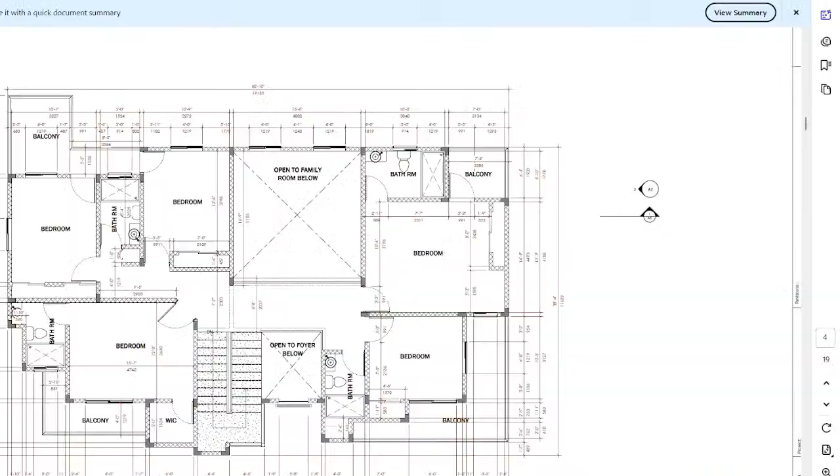So this is pretty much a six bedroom house that I am supposed to do some cross checking on. There's an initial quantity that was done for this property. I was asked to do some reevaluation because the quantity is old. It wasn't done by myself, so I can't really vouch for it, because everybody does things differently.

So basically the situation is like this, and I'm doing this video mostly for people who are either in construction or who want to do construction. This is the process that I recommend. Other people might recommend something else, but I'm just referring to what I use and how we use to get good results, well, majority of the time.

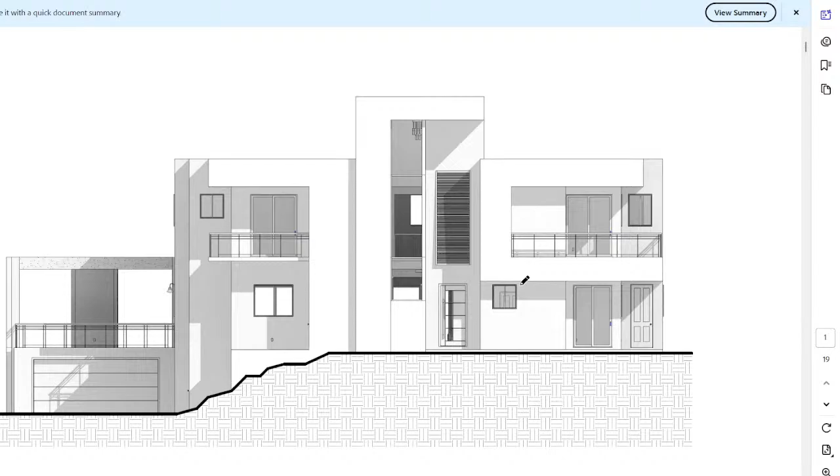So the case is this: a customer shows up, or gets an architectural drawing done. They want to do construction. There are many times one might want to go to things like rates, such as what you see on Excel now. In other cases people will go to contractors to get estimates, etc. But many times I think those approaches are based on a lack of information as to how most of these business arrangements are supposed to take place.

Most customers are looking for the perfect contractor that has everything well put together, that they can just hire and go forward with. Most persons in construction think they are actually that good, so a customer can engage them like that and get good results. But there's no consistency in anything in the technical world. Things many times can come together, and they can fall apart based on rough ideas.

So going back to my setup, the drawing is done. Let us see if I have any kind of diagram that can help me. I'm going to try and run this for one hour, hopefully I get a guest or two, especially on TikTok. If I don't, I might be off earlier. So I usually use a draft, like a chart, as to how you move from one location to the other. In this case, the drawing you're seeing lines up with what we'd see as the approved design, right? That's what is being presented.

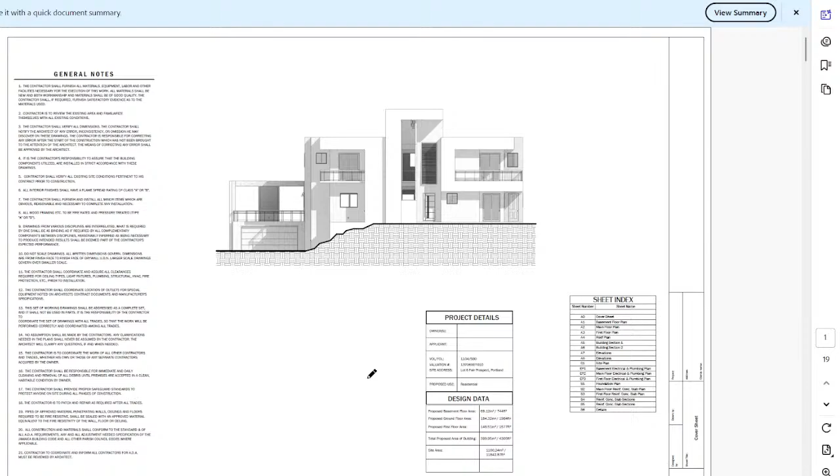Now, let us just say fine, the contractor is going to be engaged. There are several questions that need to be asked from the customer standpoint, and there are several things the contractor needs to know. One of the first things is going to go around the design data, which is the information presented here. This is the common go-to for persons who want to engage in construction related activities.

They are going to common time go to the total area of the building. In this case, it is saying 4,305 square feet. That's a total, and many times you are going to get the typical approach, which is multiplying the area by a square footage cost.

Now, I personally am not a fan of the random square footage presentation, because there are a lot of questions left unanswered. Many times it can present a case that work is at a certain price, and it can confuse people into thinking the project is either too expensive, or even too cheap—I'll just put it like that.

Now, what a person uses for their square footage value will vary. There are people that will use 15,000. There's people that will even use 14,000. There's people who use 20,000. There's no consistency or any regulation on that matter to prevent a person from saying a square footage cost.

The issue with the square footage presentation, similar to what you're seeing on display here, is that after presenting this info, there's many times the need to answer questions the customer might ask. So let us say the customer here, that is going to be say $60 million—there are several questions that are going to come up.

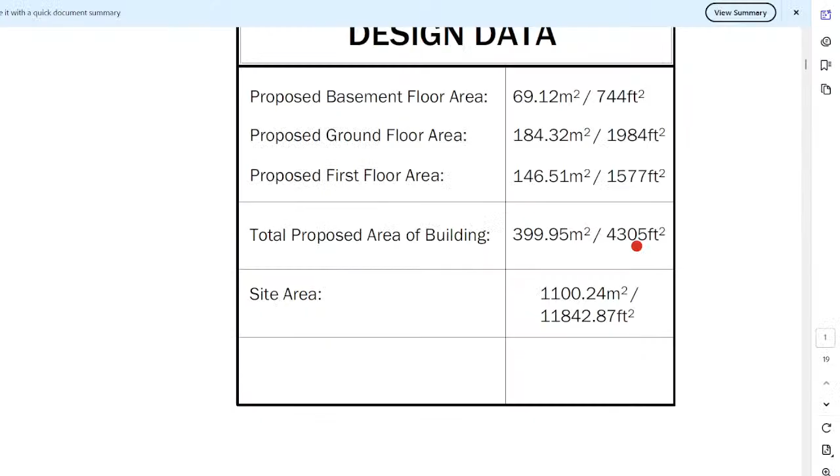One is, how much money will be required to start the project? How much money is needed to carry it to a particular point? In this case, it's almost like 2.5 floors, and I can show you back from the presentation. Yeah, so this is like a half a floor, this is a full floor, and another floor on top of it.

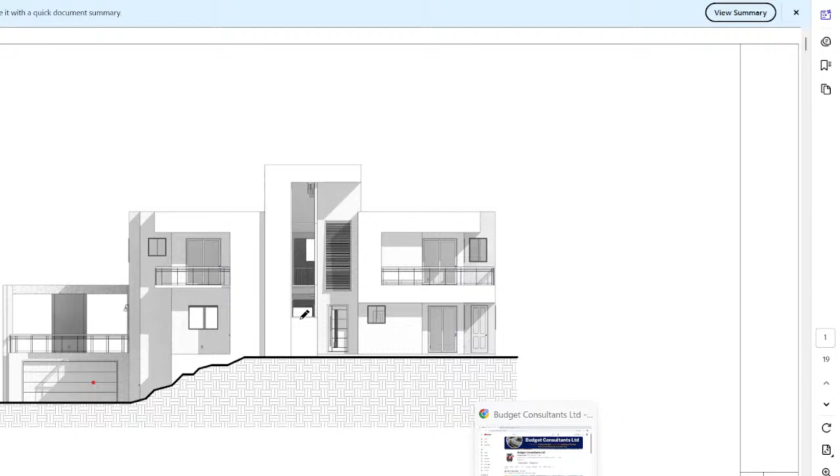Now the customer might ask, how much money does it take to do the basement alone? How much money does it take to do the ground floor alone? The ground floor and basement might exist also, and the person is asking how much to do the top floor. Let us say one presents the square footage cost—after that question is asked, many times the question will be, how much money is it to do the wet work? How much money is it to do the finishes?

Now, the issue I have in pointing out the square footage approach as being an issue is that many times one can't really present to a customer, from a point of zero, well, we call it a lot of knowledge, this is what you do or this is what it takes to move from one point to another. So this is one ability that most contractors we work with have. A contractor might be part of the system or part of the training, and they are going to be asked that question.

They would use the calculator that's on the platform to answer that question. So if the customer asks how much money to start up the site based on certain conditions, they can say, alright, $1.3 million. Though it might be projected to be $60 million, instead of asking for a ridiculous amount of money.

At this point in time, I don't recommend that any customer pay out more than maybe 10% to start off any project, unless there's going to be something like a performance bond involved. I don't recommend it based on what's going on in the sector, and the fact that I can't vouch for anybody to undertake work with a major deposit in their hand. So, sorry for persons in construction, I'm not trying to be harsh, but yeah, that's what I think.

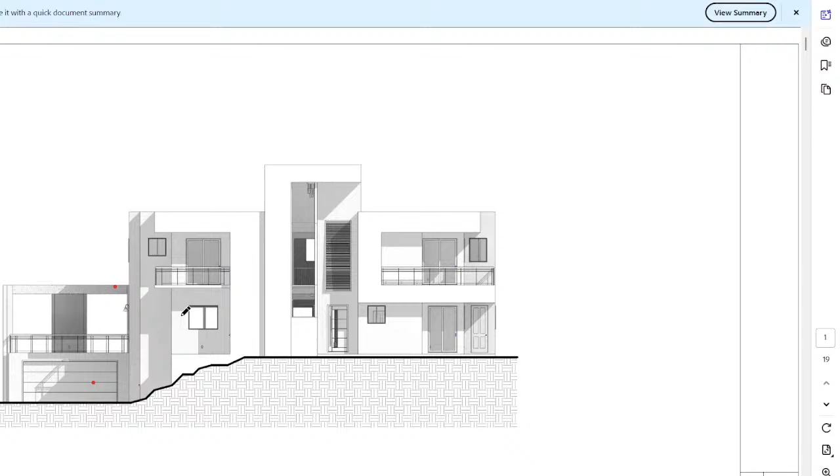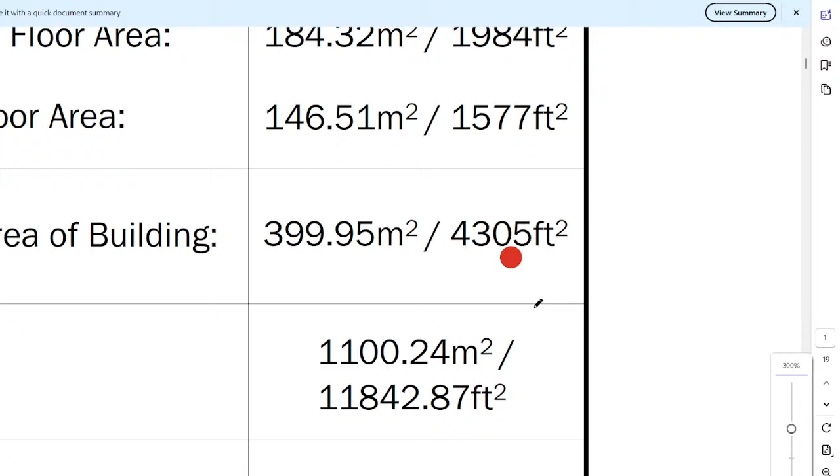So we may have the square footage basically. I know that it is 4,000 as seen here - it is 4,305 square feet. Like I said, the projection is going to say this.

If these kind of documents are being asked for, what I normally do is do my first cross check with this. So in doing my first cross check, I would see whether or not the projection that somebody is giving seems to be lining up with reality.

So I can use a second document in this particular instance to check the different levels - the basement, the main floor or ground floor, and then the first floor. Now I'm going to take the data similar to how it's on the drawing, because I know that's what many times people use.

Looking back at it, on the basement it's saying 744 square feet - I'll put that here. On the ground floor it's saying 1984 square feet. And on the first floor it's actually saying a total of what?

1577 square feet. Now, though it's not commonplace to check or cross check these, I usually like to do a little cross checking of my own, so that's saying the total is 4,305, similar to what was seen before.

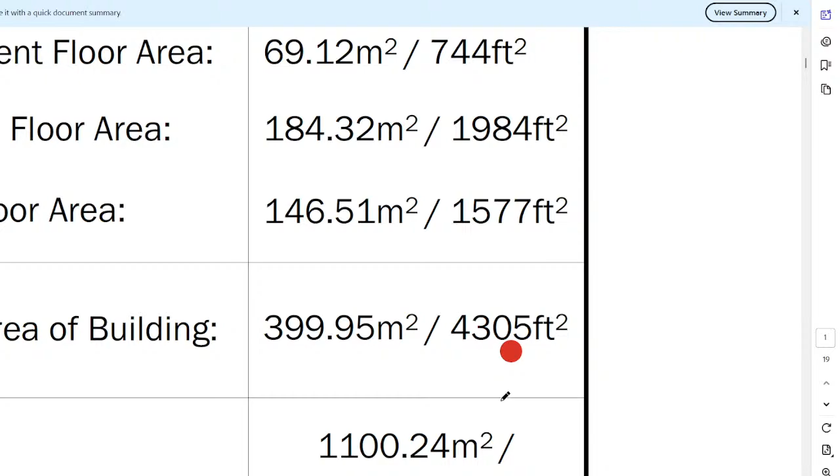And if I am going to go over an hour, I have to have an engagement where questions are asked and information can be exchanged. Don't want to preach for too long. So if you have a difference of opinion on the cost I represented, with the $70 million to do the building, which is 4,305 square feet, no problem. We can go through the details and I can validate my claim. I only warn that if you are going to take such a position, ensure you have the information on your side as well, because we have a lot of data and research behind our information.